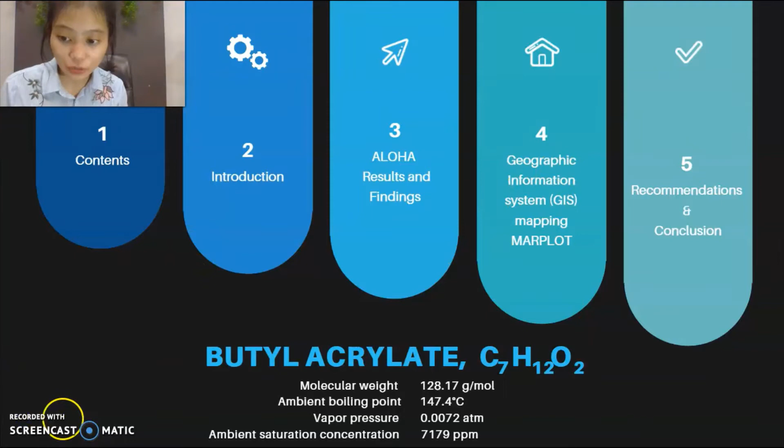Okay, so basically this will be our brief contents for our presentation today. So for the introduction, basically BASF is an integrated petrochemical complex located at Gebeng, Pahang. This company produces various chemical products such as olefins, polymers, fertilizers, and many more. The production capacity is 12.8 million metric tons per annum.

So in this study, a spherical storage tank containing butyl acrylate is assumed to be leaking through a hole at the bottom. This caused unwanted events such as toxic vapor dispersion, fire, and also BLEVE explosion. So, our aim of this study is to identify the consequences of this event, compare the difference of wind speed with the distance, and also propose several recommendations and mitigation steps.

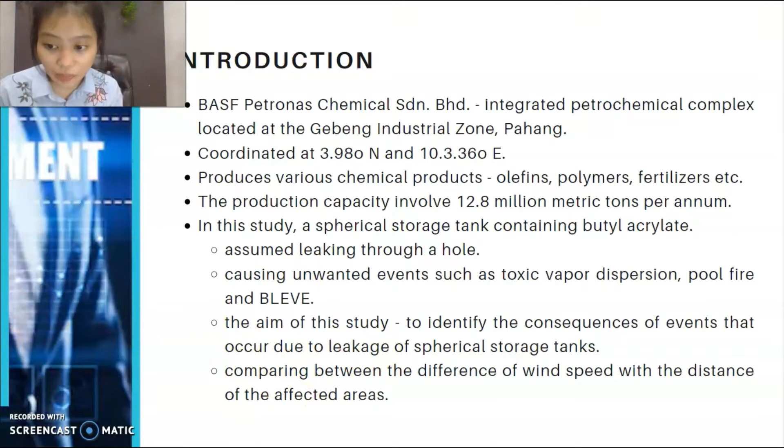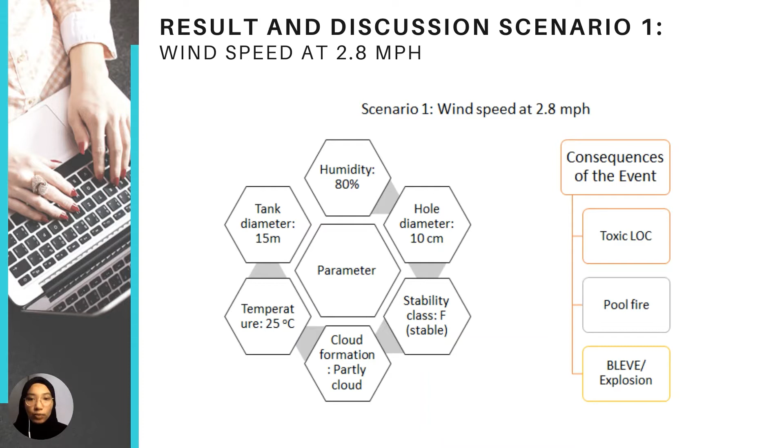Result discussion, scenario 1, wind speed at 2.8 mph. The parameters used are humidity at 80%, hole diameter of 10 cm, stability class F, partly cloudy, temperature at 25 degrees Celsius and tank diameter of 15 meters. The consequences of the event are toxic LOC, pool fire, and BLEVE or explosion. The first consequence of the event is toxic LOC.

The red zone, where the concentration is 250 ppm, toxic dispersion reaches a distance of 205 meters, affecting the facilities and nearby area. In the orange zone, toxic disperses to the atmosphere at greater than 25 ppm. The distance ranges 792 meters from the point source, with affected areas from the source to Balok Perdana. The yellow zone, where the concentration is 0.05 ppm, toxic dispersion ranges greater than 10 km. The toxic release reaches the Beserah area and enters Terengganu state.

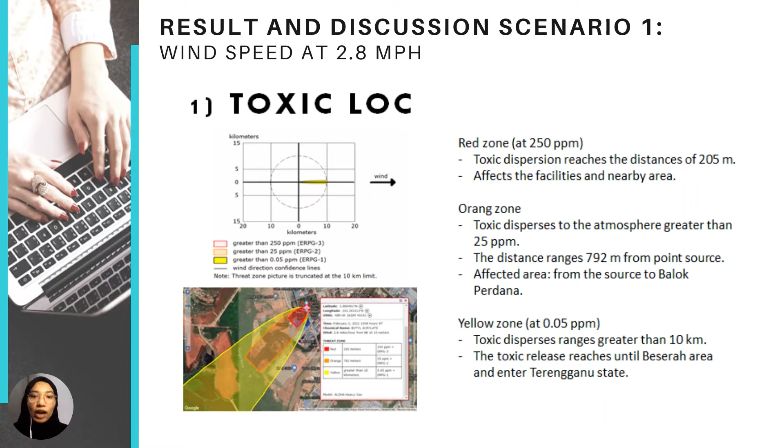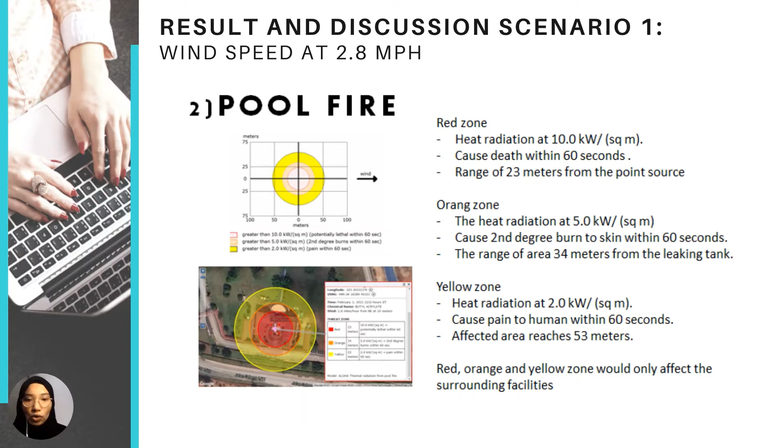As shown in the figure, the red zone, where the heat radiation is 10 kW per square meter, can cause death within 60 seconds to people within a range of 23 meters from the point source. The orange zone, with heat radiation at 5 kW per square meter, can cause second-degree burns to skin within 60 seconds, and the range of area is 34 meters from the leaking tank. The yellow zone, with heat radiation at 2 kW per square meter, can cause pain to humans within 60 seconds, and the affected area reaches 53 meters. Red, orange, and yellow zones would only affect the surrounding facilities.

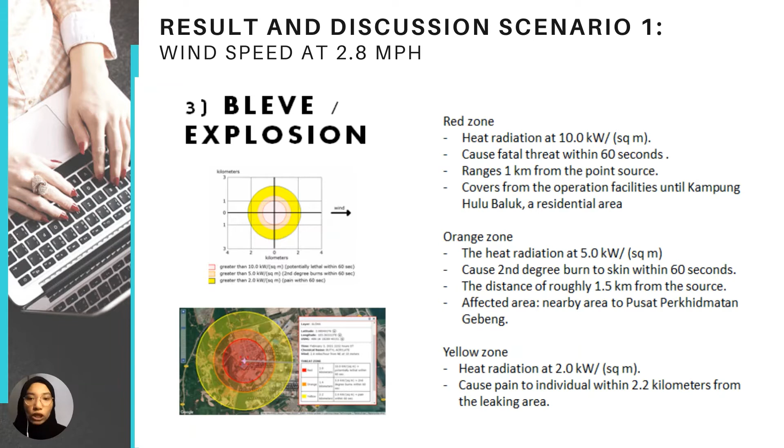The third consequence of the event is BLEVE or explosion. The red zone, with heat radiation at 10 kW per square meter, can cause a fatal threat within 60 seconds to people within 1 km from the point source. It covers from the operational facilities until Kampung Hulu Baluk, which is a residential area. The orange zone, with heat radiation at 5 kW per square meter, can cause second-degree burns to skin within 60 seconds, at a distance of roughly 1.5 km from the point source. The affected area is near the Pusat Perkhidmatan Gebeng. The yellow zone, where the heat radiation is 2 kW per square meter, can cause pain to individuals within 2.2 km from the leaking area.

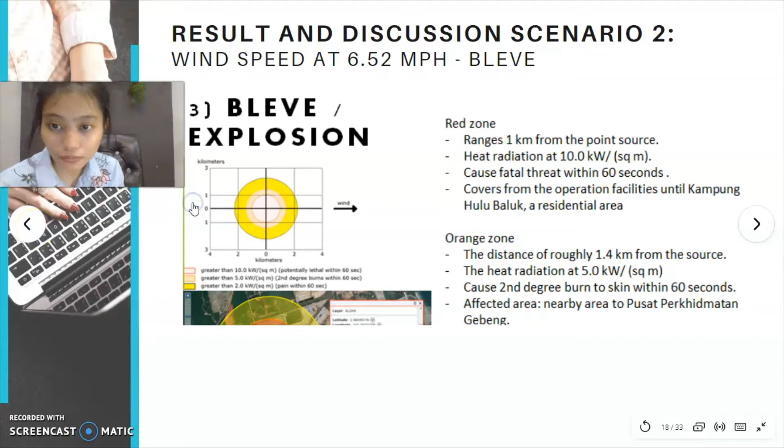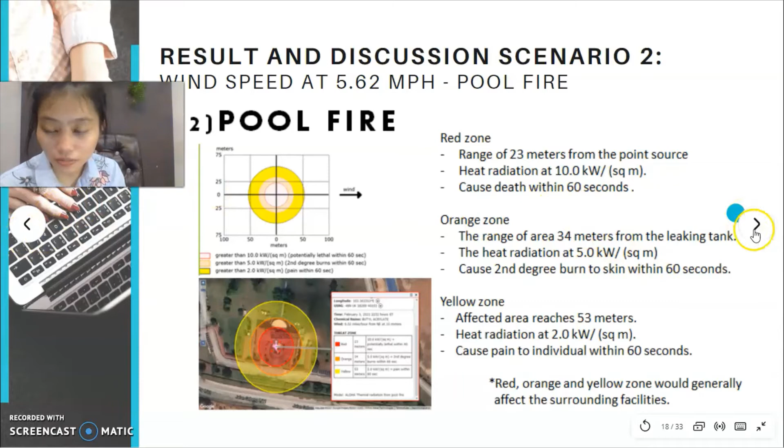Okay, so in this case, it's not moving. Hang on.

Okay, for the next scenario, the BLEVE explosion, the red zone ranges 1 kilometer from point source with heat radiation of 10 kilowatts per square meter, which can cause fatal threat within 60 seconds and covers Hulu Baluk. The orange zone radiation is 5 kilowatts per square meter, which can cause second-degree burns also within 60 seconds, and it is where Pusat Perkhidmatan Gebeng is one of the affected areas.

And the last one is the yellow zone, which can cause pain to individuals within 2.2 kilometers from the leaking area with heat radiation of 2.0 kilowatts per square meter, and this area covers until Padang Serai.

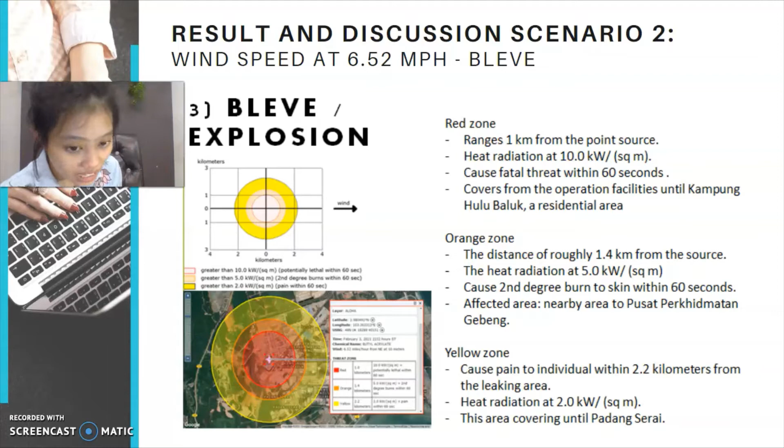So now I'm going to explain our scenario 3, which is a wind speed of 11.43 mph. Our incident is toxic LOC. As the figure shows, with the influence of wind speed, the concentration of the butyl acrylate in the range of greater than 180 meters is as high as 250 ppm. So all BASF workers were exposed to this chemical. Long-term exposure may result in respiratory illness, disease of the airways involving difficult breathing, and related skin problems.

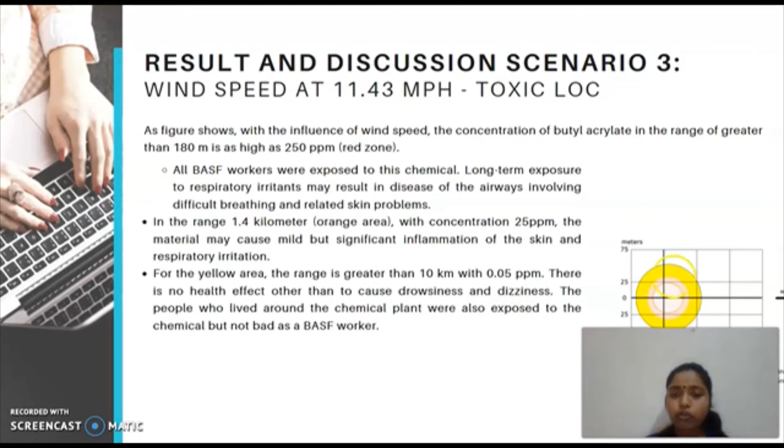In the range of 1.4 km, the orange area with concentration 25 ppm, the material may cause mild but significant inflammation of the skin and respiratory irritation. For the yellow area, the range is greater than 10 km with 0.05 ppm. There is no health effect other than to cause drowsiness and dizziness. The people who lived around the chemical plant were also exposed to the chemical but not as badly as the BASF workers. So this is the result we get for toxic LOC.

So our second incident is pool fire. From the figure it can be seen that once the butyl acrylate tank leaks and causes a pool fire, the equipment and buildings could be damaged completely within the scope of 30.0 meters by thermal radiation of 10 kilowatts per square meter. All people were dead within 1 minute. This range is under the red area.

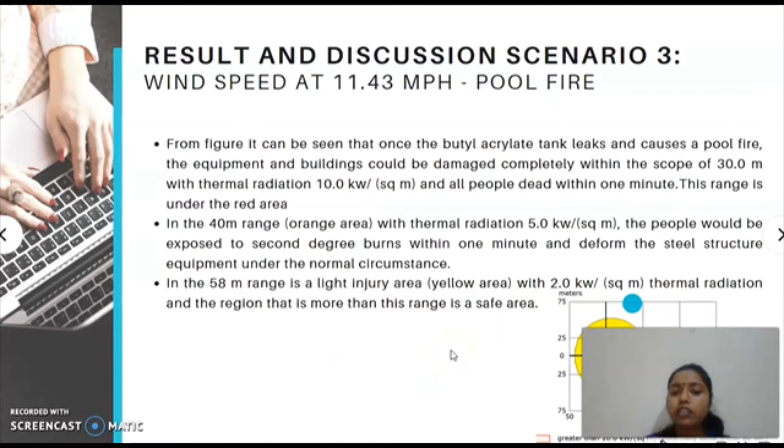In the 40 meter range, the orange area with thermal radiation of 5.0 kilowatts per square meter, people will be exposed to second-degree burns within 1 minute, and it can deform steel structure equipment under normal circumstances. In the 58 meter range, the light injury area, the yellow area with 2.0 kilowatts per square meter thermal radiation; the region beyond this range is a safe area. This is the result we get from pool fire.

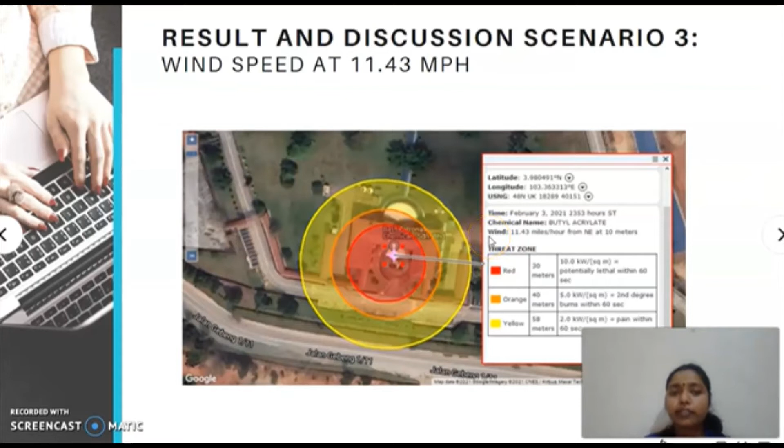And then the last incident is a BLEVE. The flammable liquid explodes and catches fire, causing a fireball. The figure shows the result of the boiling liquid expanding vapor explosion simulation. The consequences of the incident were catastrophic. The equipment and buildings could be damaged completely within the scope of 1.0 km with thermal radiation of 10.0 kilowatts per square meter. All people die within 1 minute under the red area.

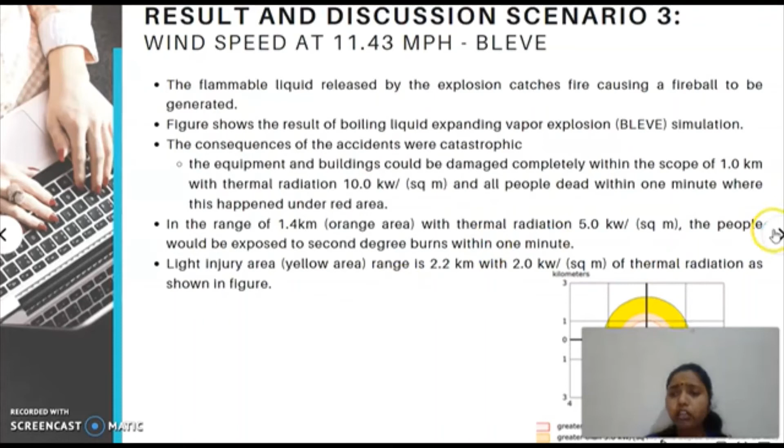In the range of 1.4 km, the orange area with thermal radiation of 5.0 kilowatts per square meter, people will be exposed to second-degree burns within 1 minute. For the light injury area, the yellow area, the range is 2.2 kilometers with 2.0 kilowatts per square meter. The thermal radiation is shown in the figure. So this is what we get from ALOHA for BLEVE. So that's all for scenario 3.

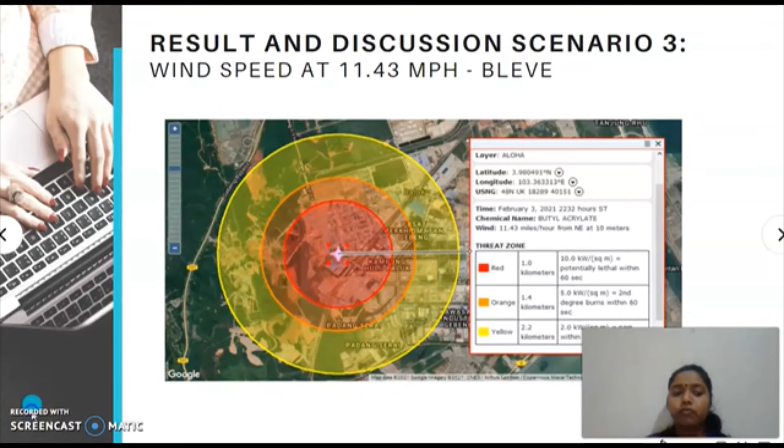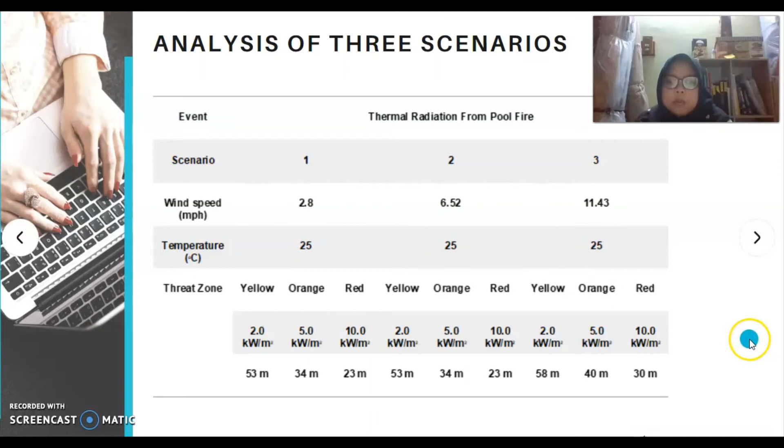The next table shows the effect of thermal radiation from pool fire for each scenario. It is known as a positive response: the higher the wind speed, the larger the area affected by the thermal radiation. For 11.43 miles per hour wind speed, the red zone affected is 30 meters, larger than the area affected by winds of 2.8 and 6.52 miles per hour, which is 23 meters.

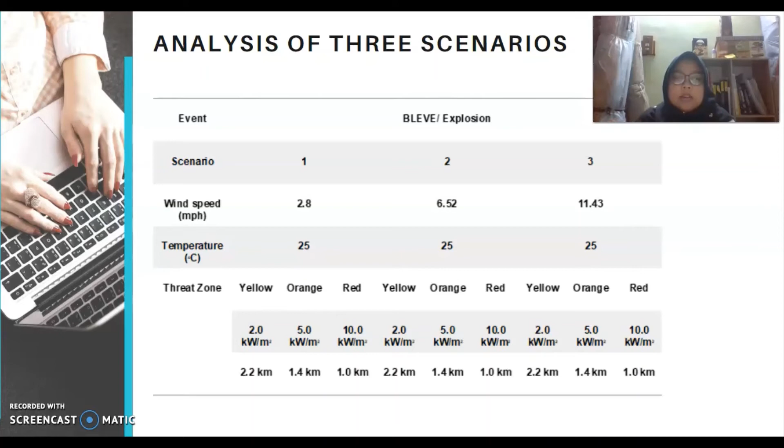So the simulation shows how the accident is caused by a leakage. That will bring 3 types of accident: toxic LOC, pool fire, and BLEVE. So as we know, from the BLEVE, the explosion will be more harmful and dangerous, as the accident release in the red threat zone is largest among the other scenarios. The explosion might affect other things, humans and also animals, and it may also cause other storage to explode too.

Okay, I'm going to explain about recommendations. So in recommendation, I have 3 main aspects. First aspect is engineering control. Second is administrative control, and last one is personal protective equipment, PPE. So coming back to the first aspect, engineering control.

So proper design and testing of the tank can prevent onset of distortion and possible rupture that may cause leakage problems. So as an engineer, they have to check the tank regularly to avoid any leakage problem. The tank should be located at a sufficiently long distance from other tanks or vessels that have a potential source of fire. The ground around the tank should have a downward slope which is connected to the safe area. The leakage liquid collected at the safe area should be disposed of by the operators in a proper way.

So facilities for generating water mist barriers close to the butyl acrylate tank can be installed. It can capture any flammable vapor released from the tank and disperse it without the flammable vapor getting ignited. So the fourth one: toxic LOC, pool fire, and BLEVE due to runaway reaction inside the tank are much less common than due to accidental tank damage from the outside, such as fire or missile impact. However, they do occur, so precautions should be taken.

Hence, the tank should have instrumentation for continuous monitoring of temperature and pressure. So the engineer can install equipment like a temperature indicator or pressure indicator to monitor the pressure and temperature of the tank continuously. So the last one is to install flame detectors and an automatic sprinkler system at conspicuous locations, especially around the butyl acrylate tank, to detect any smoke or heat due to the pool fire or explosion, so the emergency team can prepare for fire extinguishing. Then next,

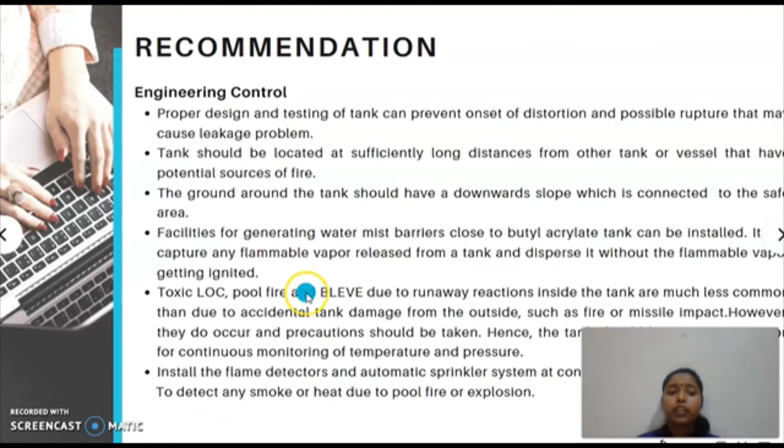Okay, so the second aspect is administrative control. Managers and supervisors are usually the ones who implement the administrative procedures and operational policies that control chemical risks and hazards. So provide adequate supervision and retrain staff who don't follow the safety instructions. Additionally, safety measures in the form of checklists covering do's and don'ts of preventive maintenance and manufacturing utility staff for safety-related measures should be updated timely and be available to all concerned departments and personnel.

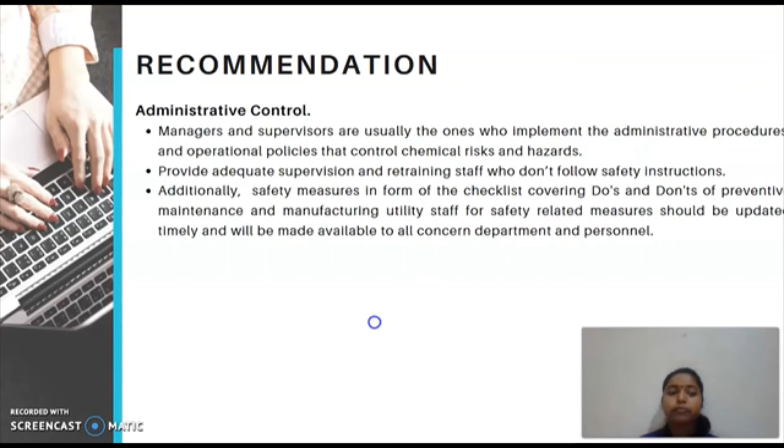And then the last aspect is personal protective equipment. So specific parts of the body need to be safeguarded when working with the butyl acrylate storage tank, because butyl acrylate is a very flammable liquid and highly poisonous. So using safety eyewear will safeguard employees from dust, vapor, heat, chemical splashes and more. It is important to make sure that the size is right when using safety glasses to avoid the safety glasses falling into the chemical.

So the third point is the worker who monitors or operates the butyl acrylate storage tank should wear suitable gloves because butyl acrylate is very poisonous, so it can affect the skin if it splashes on the skin. Okay, the shoes used should be able to withstand a chemical spill or penetration of pointy objects. Appropriate respiratory protection should be used when exposure to butyl acrylate vapors or mist may occur during the explosion. So the last one is a safety shower and eye wash facility should be provided in close proximity to where chemicals are being handled. That's all for the recommendation part. Thank you.

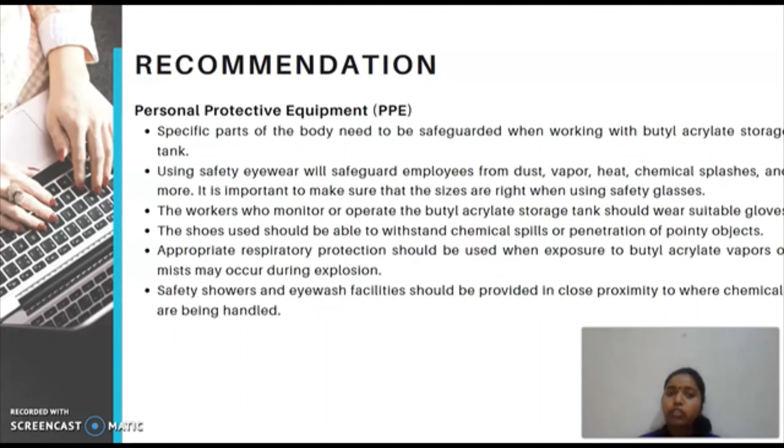As a conclusion, this project shows how the incident release was caused by a leakage on the butyl acrylate tank that will bring three types of accident release, that is toxic LOC, pool fire and BLEVE. The simulation results show that the butyl acrylate tank leaks and causes BLEVE. Thermal radiation intensity of fire increases along with the increase of the wind speed. It means that the boiling liquid expanding vapor explosion has the largest threat zone area than other scenarios, which is around 1 kilometer.

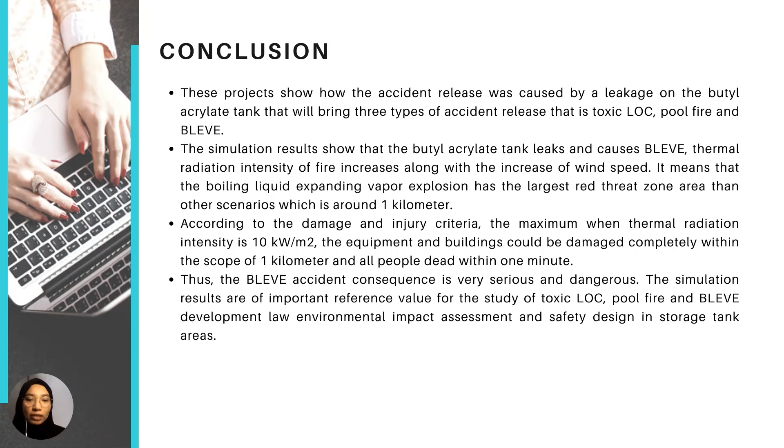According to damage and injury criteria, the maximum thermal radiation intensity is 10 kW per meter square. The equipment and buildings could be damaged completely within the scope of 1 kilometer and all people die within 1 minute. Thus, the BLEVE accident consequence is very serious and dangerous. The simulation results are also an important reference value for the study of toxic LOC, pool fire, and BLEVE, development, environmental impact assessment, and safety design in storage tank areas.